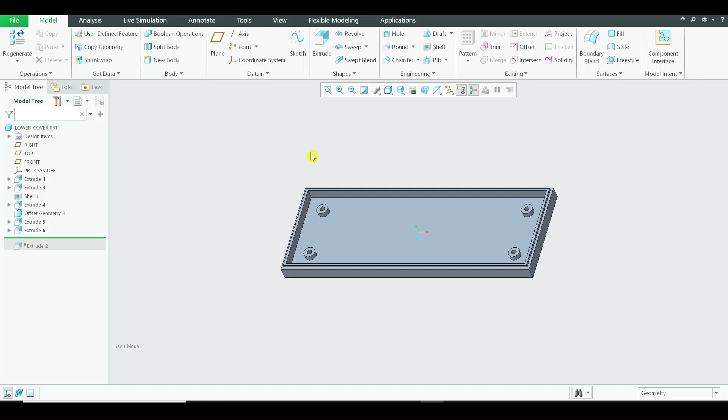Alright, so we have created the clearance hole in the lower cover. The next job is to create a tapped hole in the upper cover. Let us come back to the chart which we are referring. I'll be adding this link in the resources. You can just go to the chart and you can analyze depending on your requirements.

Now, as we have considered the number screw size of the screw, and we have already covered the clearance hole creation, let us look at the tap holes. Now you can see that there are different types of categories over here: thread for aluminum, brass and plastics, and this is for other metals.

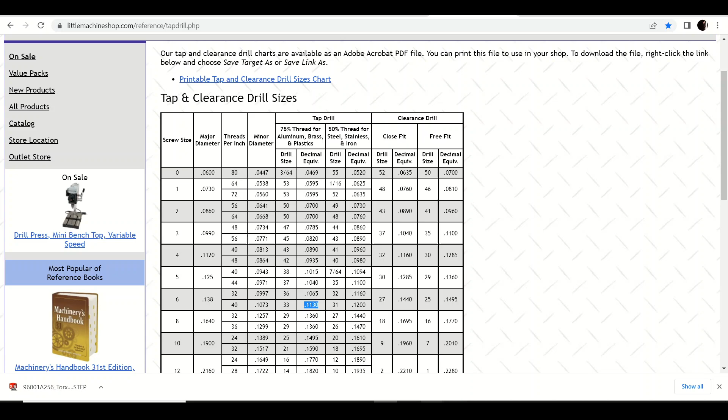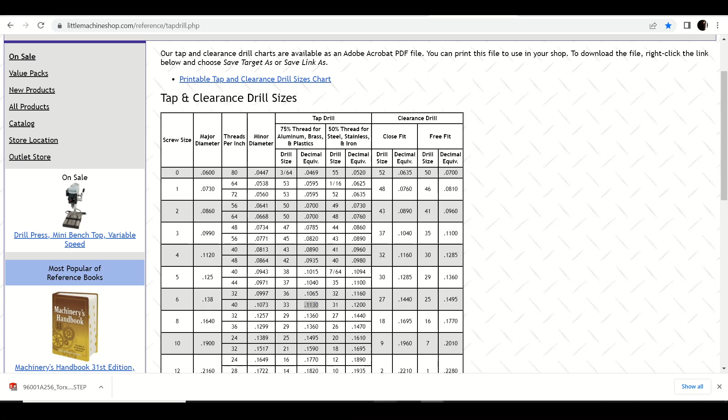I'll come back to the upper cover and we will be creating a hole over here whose diameter will be 0.1130. For that, I require a reference point which refers to the center of the circle. 0.1130.

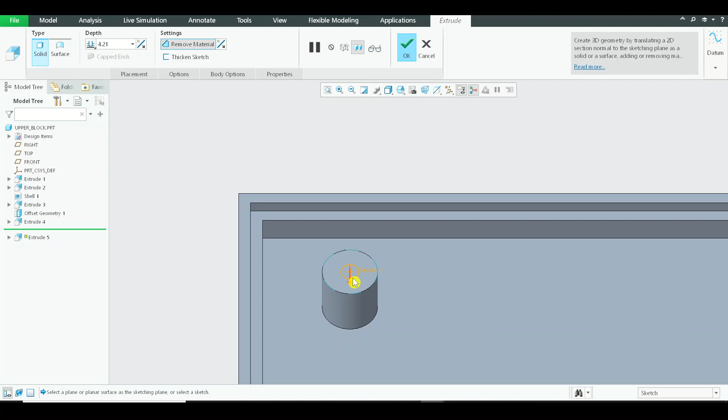Alright, press OK right now and change the direction. We have to remove the material, and that removal must be up to the surface. Okay, we don't want a hole coming up in the positions where the switches are placed. The hole should end at the surface. Alright, so now we have a tapped hole present over here and we have a clearance hole.

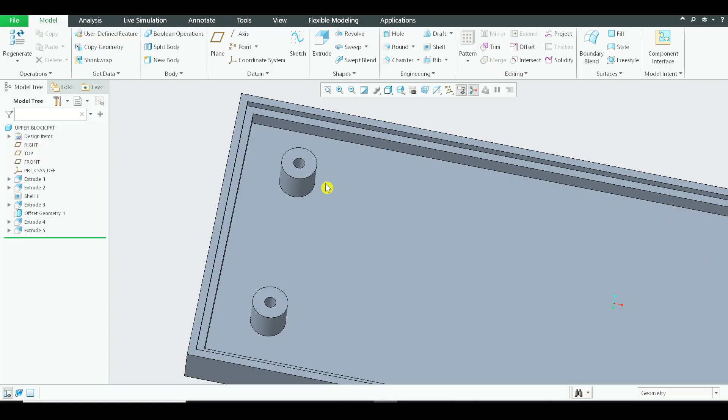Let us come back to the assembly and take a cut section exactly at the positions where holes are visible. Alright, so this is a clearance hole and this is a tapped hole. So we have done this thing right now.

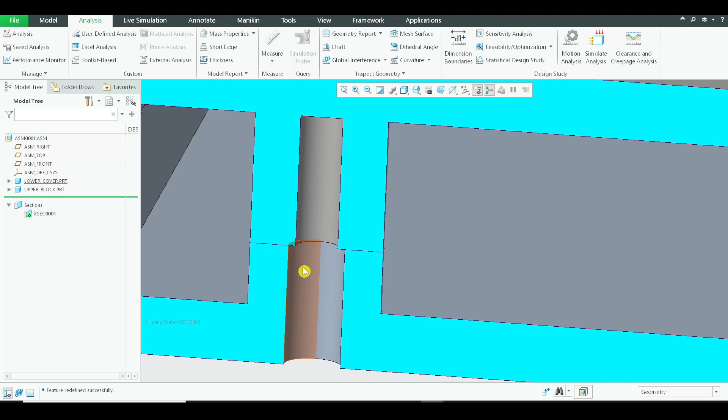Now in the next video, we will be adding these screws in the assembly and analyze whether we require any modifications or will that suit our job. Okay, let us move to the next video and work on adding the screws to the assembly.